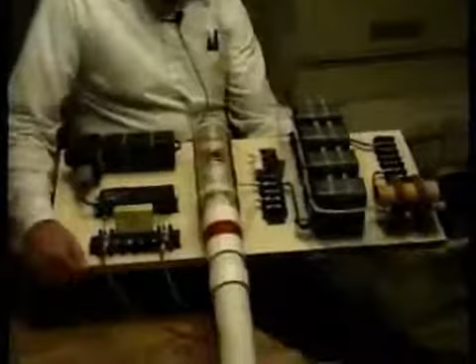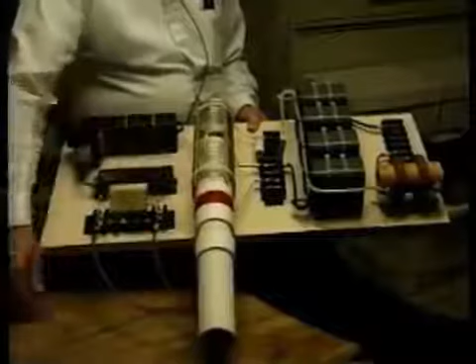This is the broadcast end of it, or the part that sets the electromagnetic field into oscillation.

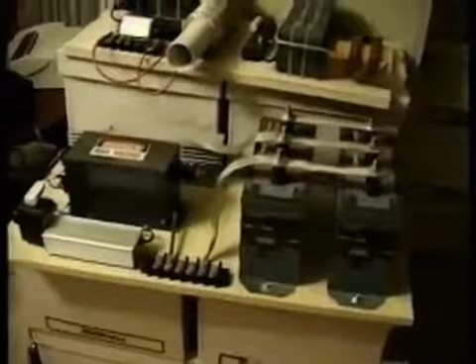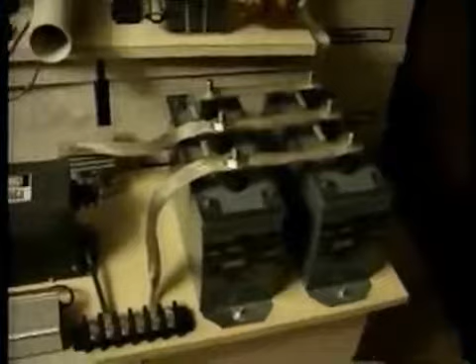So you can see that it has the same components that the other device has. They're just scaled up somewhat.

Have you used this one? I've had it. I've started it, and I know that I've tested it, but I haven't run this particular one for any extended period of time, except to just start it.

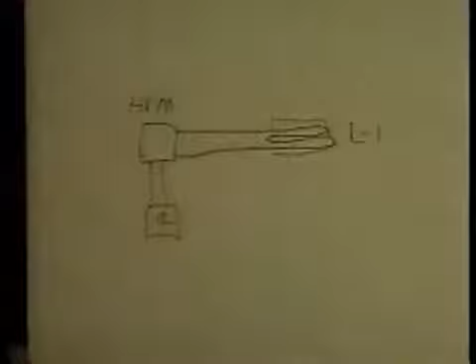И идет вот так, и возвращается обратно вот таким образом. У нас высоковольтный прибор и сердечник L1. И все работает отлично. В этой точке мы имеем 35 тысяч оборотов в секунду.

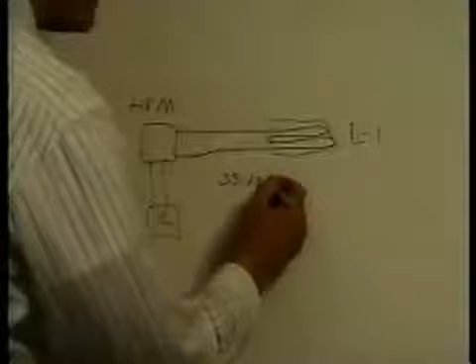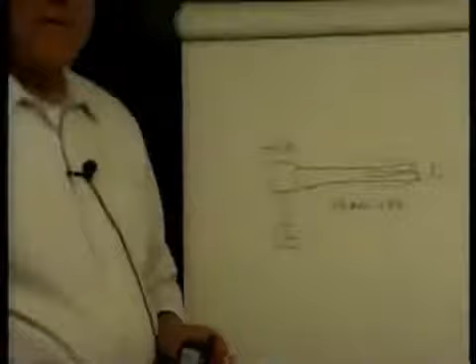Метод, которого я здесь учу, вы не обязаны знать об оборотах, длина проводов иррелевантна. The length of the wires that go on this coil here are basically irrelevant because it's being pumped by the high voltage device here, and that's going to set the frequency. The length of the wires is not going to have anything to do with it. So you don't have to know how to tune it to do this.

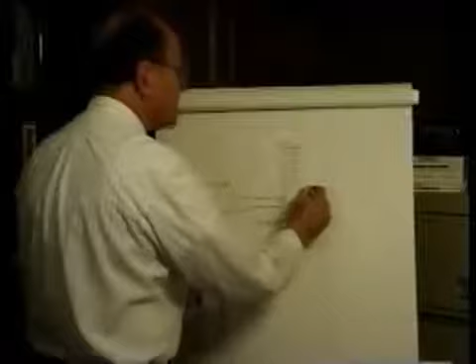Второе. The next thing is that we're going to have an L2 coil here, and it's going to have a minus here, plus here. Электрическая энергия всегда течет от высокой концентрации к низкой. Но в этом случае происходит следующее: у каждого сердечника есть конденсатор и индуктивные характеристики.

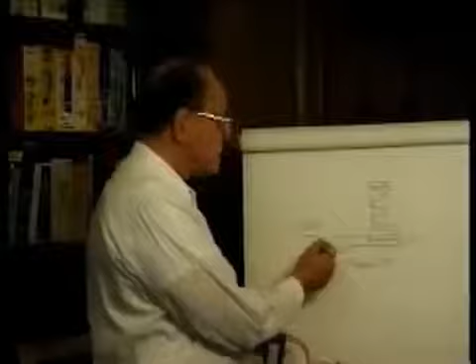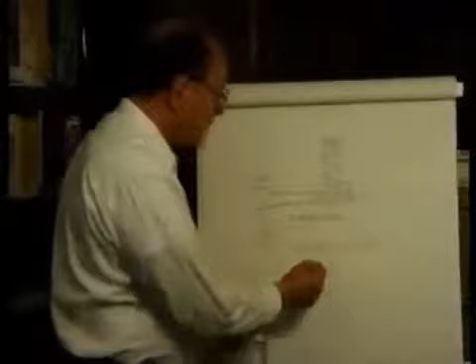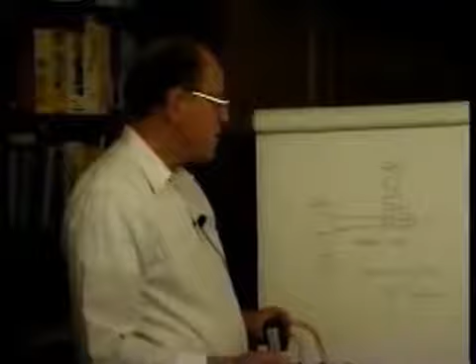Поэтому он увеличивается, он увеличивающийся. К примеру, здесь скажем 3000 вольт и 10 оборотов здесь. Итак, это вольты, здесь 10 оборотов. Делим на 10, 3000, и получаем 300 вольт за один оборот. Вот здесь, на L2, каждый оборот равен 300 вольтам. Если у вас 30 оборотов, у вас будет 300 по 30.

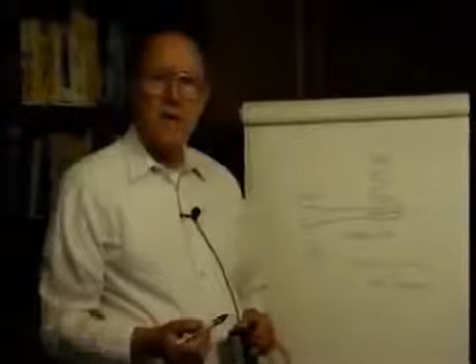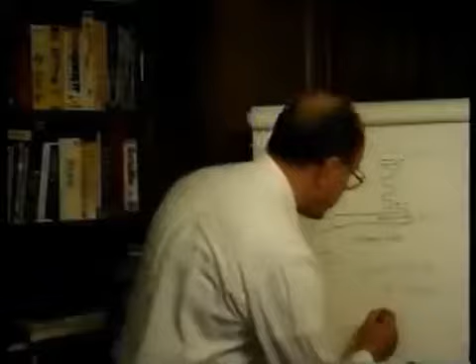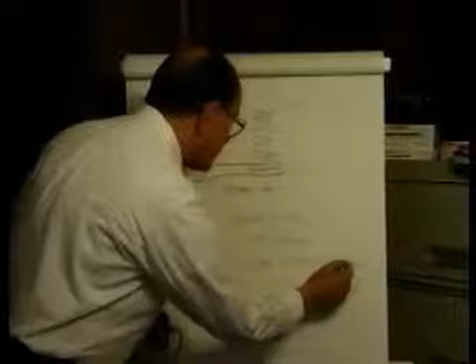300 times 30, which would be, let's see, 300 times 30. Okay, and that's going to be... посмотрим. 300 раз по 30: 0, 0, 0, 0, 9. У вас будет 9000 вольт на сердечнике L2.

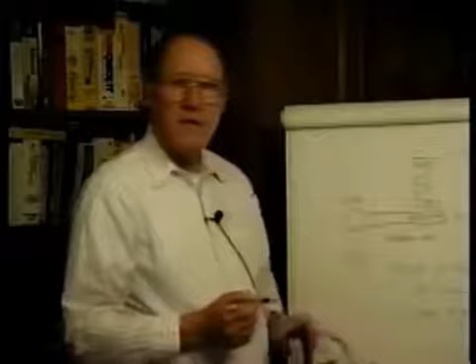В зависимости от количества оборотов, от частоты, то, что мы делаем, усиливает до 35 тысяч оборотов в секунду на первом сердечнике. Мы также усиливаем на втором сердечнике, повторяя то же самое. Это внутреннее распределение умножителя на проводе и на первом сердечнике.

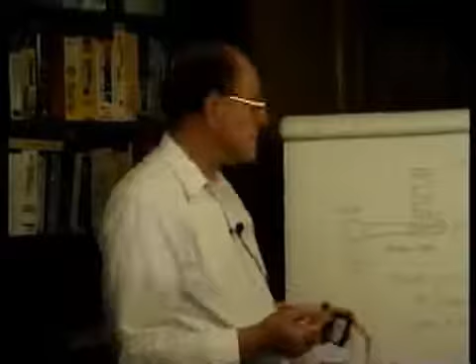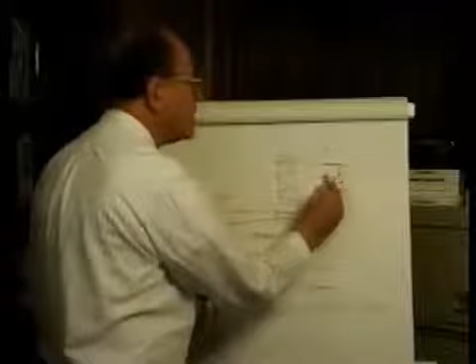Итак, в этой точке мы имеем 9000 вольт на выходе и делаем разрядник для искры и заземления. Здесь место, где искра уходит через заземление. И это ограничивает уровень вольтажа, чтобы устройство стабилизировалось.

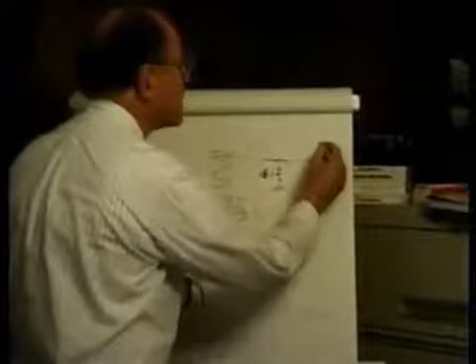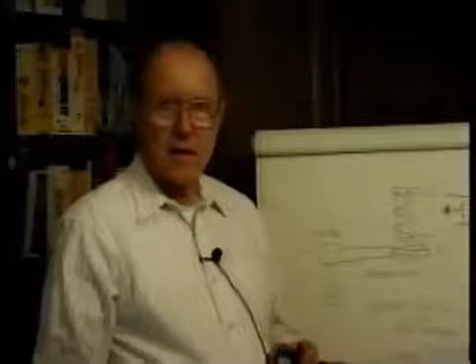Теперь идем прямо отсюда к трансформатору. И изоляционный трансформатор — это очень важно сделать на данном этапе, поскольку имеем частоту, которую изоляционный трансформатор не может использовать. Вам нужно корректировать частоту. Чтобы корректировать частоту, вы помещаете резистор через два полюса вот здесь.

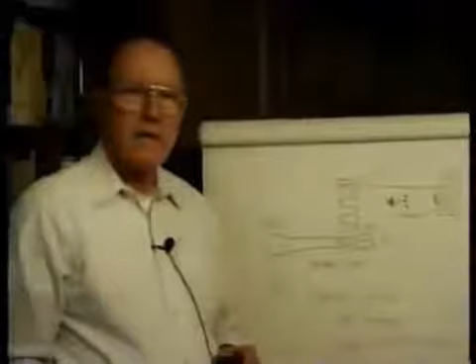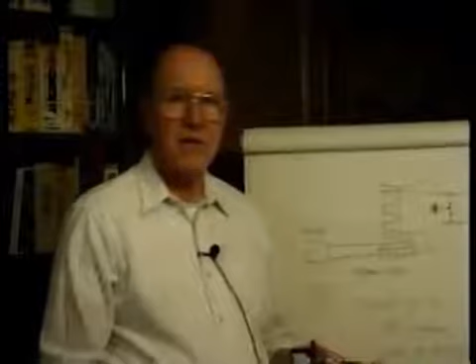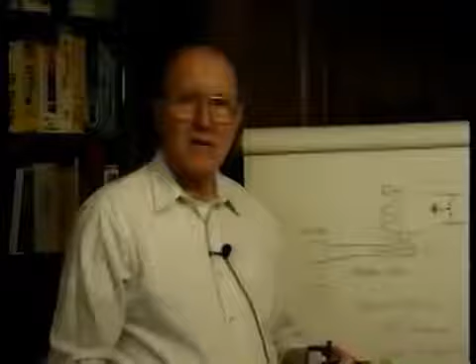Capacitance and resistance and other types of things, which will tell you what approximate frequency you'll end up with. Now, in the case of American Radio Relay League, you're going to be off the end of the chart, and you're going to have to take a little piece of paper and make the grid and extend the chart over about an inch or so, and about an inch or so down, in order to get, say, 60 cycles or 120 or whatever it is you want. But you can do that real easy.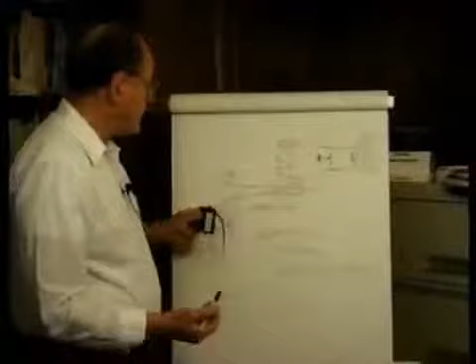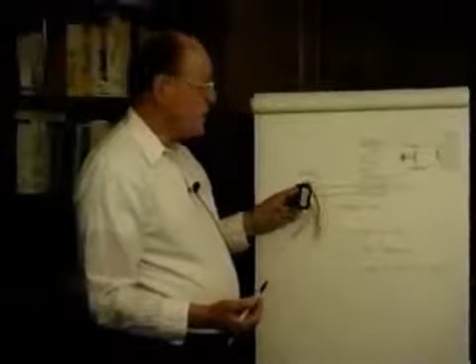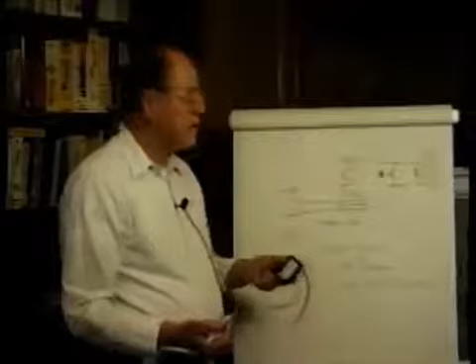So anyhow, we've got through our 12 volts, and none of the electrons from the 12-volt battery have left the high voltage module. Точно так же, как в трансформаторе здесь, где вы имеете две стороны, отделенные друг от друга. Электричество с этой стороны не проходит сквозь систему, оно проходит сквозь индукцию. Это возбуждает сердечник на другой стороне.

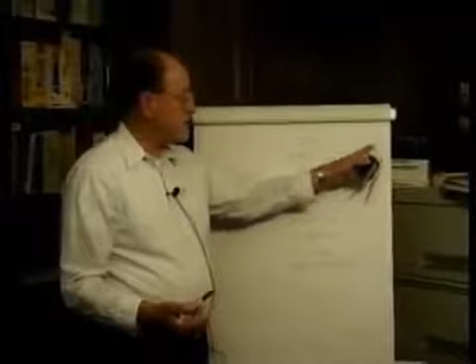И электричество отсюда выходит через заземление. И ваш заряд располагается между заземлением и другим полюсом трансформатора. In between the earth grounding and the other pole of that transformer.

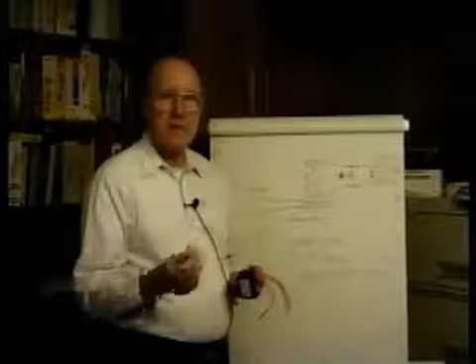And you're going to have to also put some sort of voltage control on this thing here, and that will be a varactor, V-A-R-A-C-T-O-R. And what that is, like on your computer where you have a voltage control thing that keeps the sparks from coming in, it looks like a little capacitor, but it's not. Просто понижает напряжение до определенного уровня, который необходим устройству для работы.